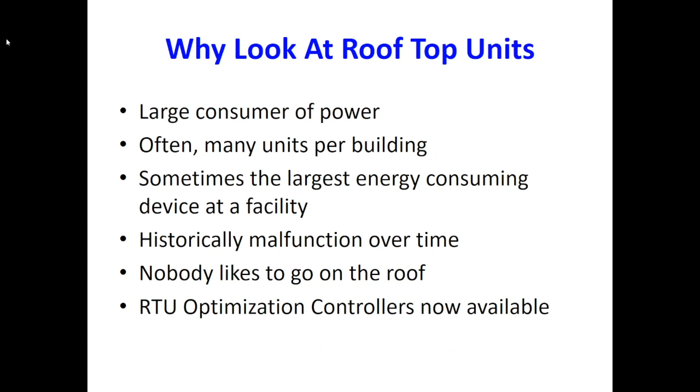We look at the outdoor air temperature. We look at the supply temperature, which is the appropriate things to normally look at. But we can also look at the CO2, which is down in the space, and the CO2, which is outside. And we also can monitor the supply fan and throw a variable speed drive on there and start to play some fun games with it by slowing the fan down.

And if the customer has a little old thermostat on the wall, the people who do this can go in there and put an EMS type Wi-Fi thermostat like we've heard about a little bit earlier. Or some folks can even put a VFD on the compressors here, depending upon what type model you do. But we're going to take this rooftop unit and we're going to change the way it operates. We're going to be measuring inside, outside temperatures.

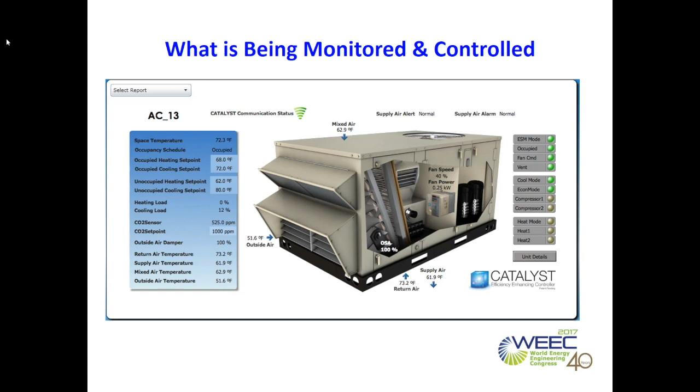By just paying attention and caring for the rooftop unit and making sure that it's operating to its efficiency, that's a lot of money you can save. And again, a lot of companies are doing this now. So it's sitting on the roof. Somebody paid for half of it. The utility paid the incentive. Now someone comes knocking on the door and says, hey, we have this demand response program. Okay. Geez, maybe I can use this new optimized system I have.

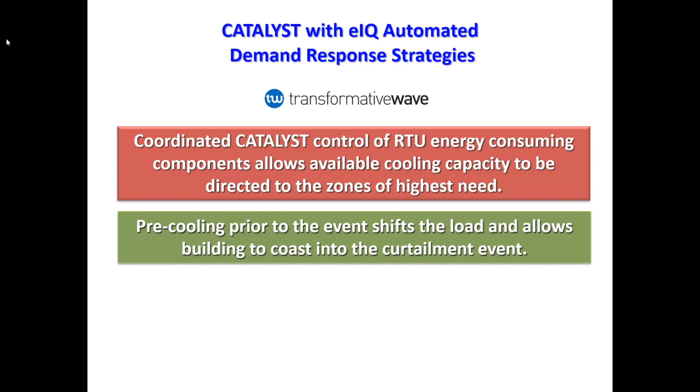And here's an example on the board here of some of the things that we could do in addition to all the energy efficiency saving measures that we got a rebate for and we're saving kilowatt hours. Well, we can start to do a little bit of the things you always see big high-rise buildings do. We coordinate the RTU energy consuming components that are available, and we can change zones. We can pre-cool the building. We've talked about that a little before in demand response stuff.

We can change the set points, but this is all inside to the rooftop unit. Okay? Duty cycle, things like that. So this is inside to one rooftop unit. So as we heard earlier in the first presentation, they're going to, I shouldn't say control, cycle on and off different rooftop units of 100 rooftop units or 1,000 rooftop units. Here we're just talking about one rooftop unit in this presentation. What are the different things we do for one rooftop unit?

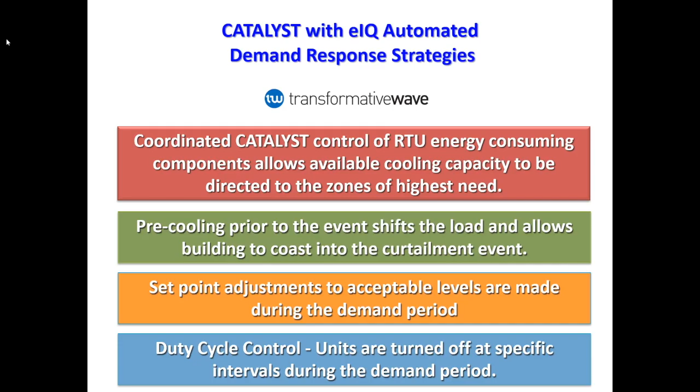And then once you get that all down, then you hit it with that swarm type stuff that we heard earlier today from Encycle, and your savings get even greater. And this just shows, we've seen a couple of charts like this today. This was done out at, I think this was Pearl Harbor, where they ran the rooftop units and they started doing demand response signals and all that stuff. And the rooftop unit went to a different sequence of operation. And above and beyond its normal energy efficiency savings, it was able to do demand response.

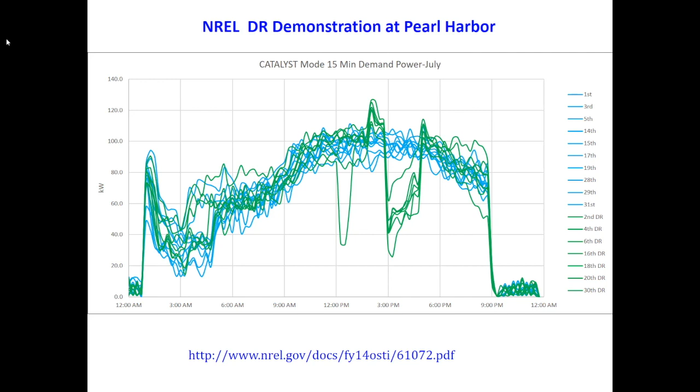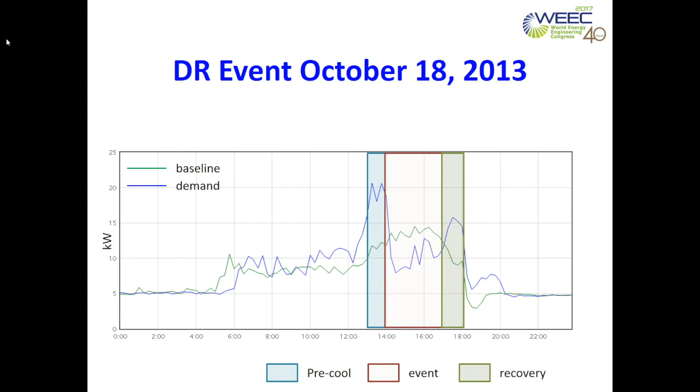So this is a little bit of what the chart looks like coming out. And then a little bit before, after. You've all seen these graphs before. The benefit of temporarily shifting our electrical usage. Okay, remember 30 years ago we were doing this at the utility. It's 2017 now, and we're still trying to do that, still trying to lower our peaks.

Okay, now on the rooftop units, there are other things we can do and manipulate that are kilowatt hour savings, demand savings, or can be both. And again, at the end of this presentation, I'll talk more about the dollars available and different ways of looking at it to maximize the amount a customer can get by operating his equipment in the appropriate programs.

So this is a system where we mist the condenser of a rooftop unit. Now, why would anyone do that? Why are you going to throw water at my coil and all that stuff? Well, believe it or not, if you mist into the air, it drops the temperature of the air. Now, we know that. It's called a cooling tower, right? We've all seen that before. Okay? You've all run road races. Someone misted you with a spray going by.

It feels pretty good. Well, here's a system on demand response that when they get the call, and it's usually in the summertime, you turn this system on, and it drops the temperature 25 degrees as the condenser coil sees. Drops down the kW during the summer if it gets called upon in demand response mode. Now that's important because when it's 100 degrees outside, it's 110 on the roof.

And your rooftop units, once it gets over about 100, 105, some of them are consuming almost 50% more electricity because the compressor has to work harder than at 30 degrees less. It's not a linear relationship. Hence, the whole reason we have demand response programs is because of the vapor compression cycle that you all have in your refrigerators, your cars, your homes, the building we're sitting in right now.

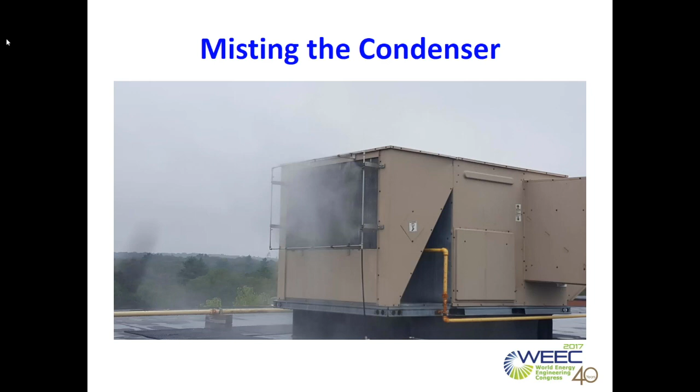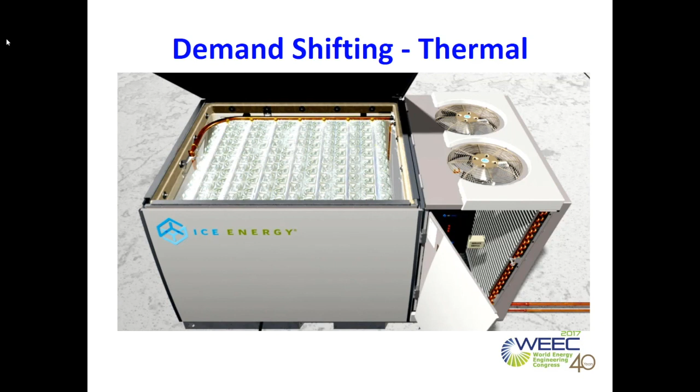Demand shifting—someone mentioned this earlier. Hey, if you've got heavy demand and your rates say $36 per kW per month in the summer, what can we do? Well, I can just make ice during the nighttime and use it during the day. That's what this does. So this could be a way of looking at the rates you have and saying, my electrical rates are so bad. You all know what a ratchet rate is? It repeats for the last 11 or 12 months. You get these different rates around the country—this might be a great device in Albuquerque, but not so good in Idaho. All these measures depend upon where you are. That's an Ice Energy example of one, again using ice.

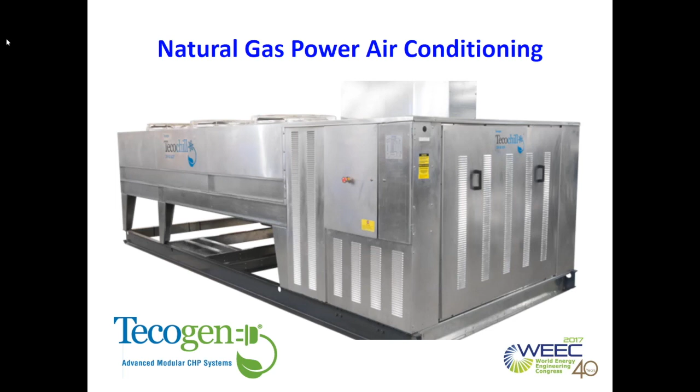Natural gas—you might have rooftop units getting old and want to replace them, and someone says the electric utility may incentivize you to put in gas units. Sounds a little weird? Think it happens? Sure. There are many utilities across the country running out of capacity—copper in the ground. Anyone from New York City here? Are they running out of copper in some places around New York? They're paying people 80% to switch from electric air conditioning to gas air conditioning, and the electric utility is paying you for it—demand reduction. Not saying you should do this, but it's something to look into.

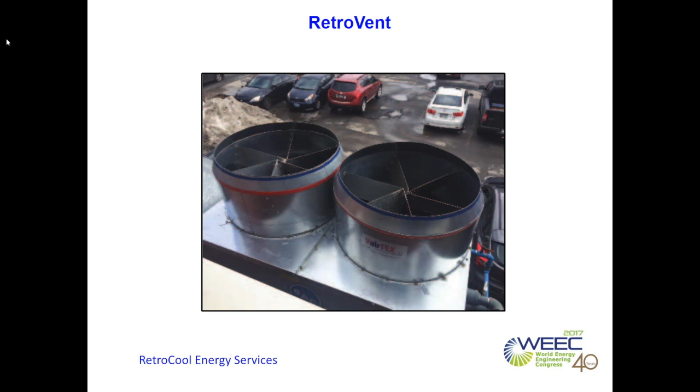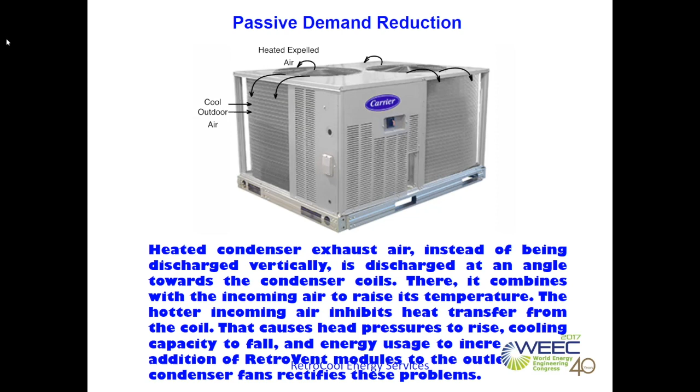Passive demand reduction—rooftop units are sitting there. What are some other additional energy conservation measures we can do? As a retrofit, you put these on top of your rooftop units or condenser coils. Here's another picture of it—it pulls the air and sends the condenser air far away from the rooftop unit. Going back to this slide—you've all seen those before, right? Anybody ever walk up and put their hand over the fan? People would think the air must be blowing straight up. No, it goes sideways, right into the cooling intake for the air. So they're dumping very hot air right back into where they're trying to cool it off—it's just recycling it. This is an example of a demand reduction measure where the utility would incentivize it.

They get credit from the ISO as a capacity market resource. You may not know that as a customer—you may just get a rebate from the utility or an incentive, whatever the case may be. The misting type controls can be either fixed or cycled. This one is fixed so it's working all the time, but it's still a demand reduction measure, and a kilowatt-hour savings measure I should say.

Go back two slides—that one? Those are just duct extensions? They're duct extensions with vanes inside at certain angles calculated to spin the air and get it away from the condenser. It's the same concept as the front of a jet engine, with vanes to speed things up—no moving parts. We all know this, but I'm just giving you examples. It's a cowl with blades turning inside, as examples on the roof.

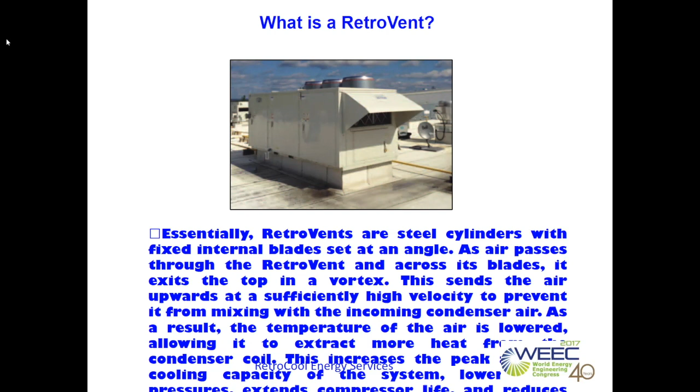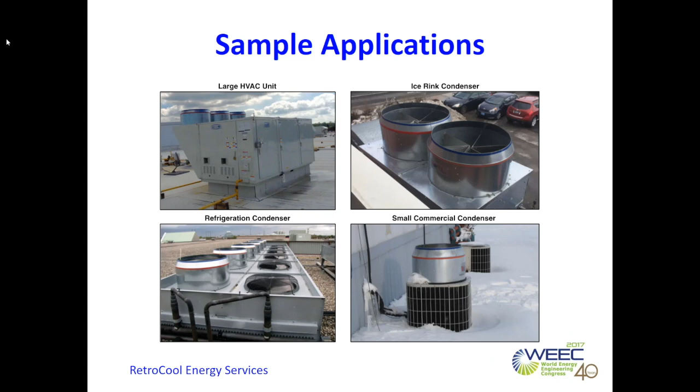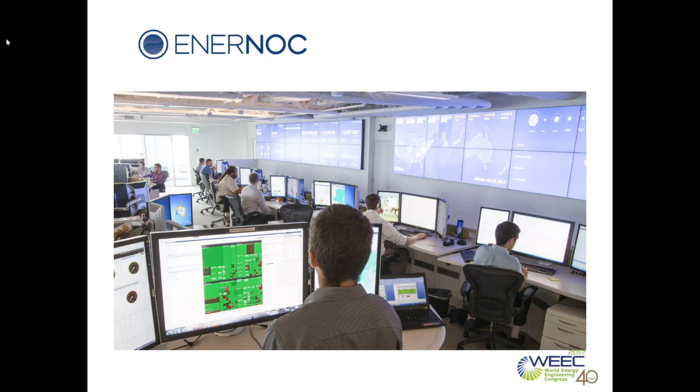This is just a slide showing EnerNOC Center up in Boston, where they actually look at all the folks' meters all over the country and all over different parts of the world. And when they get called upon for a demand response measure, whether it's Albuquerque today or London tomorrow, it gets initiated out of this location. This is why large corporations tend to use these demand response providers.

And again, there's money from demand response coming in, there's money from energy efficiency coming in. Some of the programs that are available out there - there's 50 states, 100 different investor-owned utilities, many different ISOs and RTOs out there, and many different programs available to them. So I just threw a couple real quick ones up on the board.

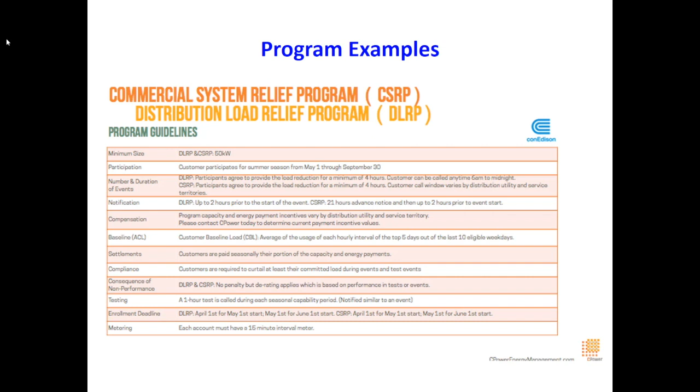This is for Con Edison, some program examples that you have to do to get money. This happens to be a couple of slides from a company called CPower, another demand response provider, with different programs. So all these ISOs allow for a bunch of programs, and the utilities within those ISOs deal out a bunch of programs, but they're all different in their own ways.

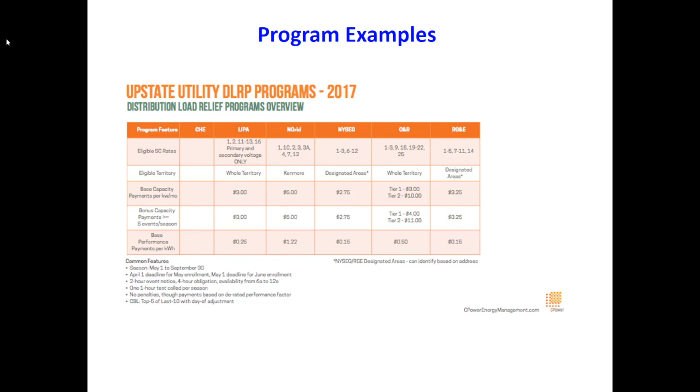And so for every single building you have to look at where the building is and then look at the opportunities presented to you. Even one state can have 20 different demand response programs. But the goal of you, if you're a customer - and here's another one, in New York State - is at least look at these. You may not be able to participate in a lot of them, but if there's 6 available and you can participate in 1 or 2, a voluntary program, why don't you go ahead and do it? Why don't you have that rooftop unit controller do something besides just energy efficiency?

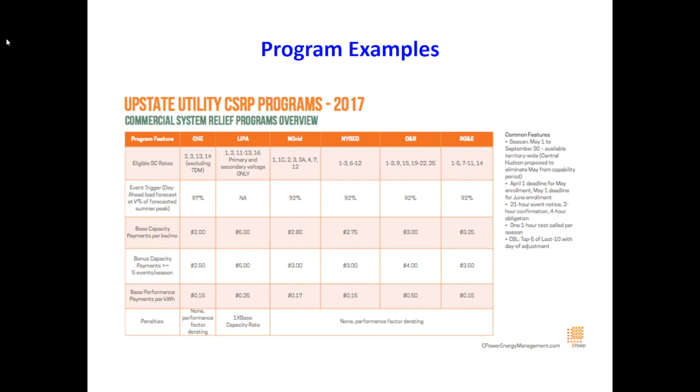Let's use it for demand response. It has the capability, it's built in, it's sitting there already - enable it and use it. The incremental cost isn't that much, is it? It's already sitting there, but many of them are running right now and they're not even in programs.

So which route should you go down for your rooftop units? Which one would you go down? Well, if you look at the far right, left, you've got your rooftop units sitting here. We talked about a few examples of misting or venting with those devices and optimizing it, right? We talked about Catalyst, Bes-Tech, and NexRev, and they're going to go in there and throw some stuff to optimize this. So this is really going to be slick, using the least amount of kW and kilowatt hours you can possibly get away with.

Then there's going to be technology like the folks at Honeywell that we heard a little bit earlier. It's going to enable us to go right there through them into the demand response programs. We may have to go through demand response providers with these systems - you might have to sign, we definitely sign deals with demand response providers. Some places you can go directly to the ISO, and then you've got the electric utility over here. In some instances, they're the providers, but they're also the providers of money for the passive type demand reduction dollars.

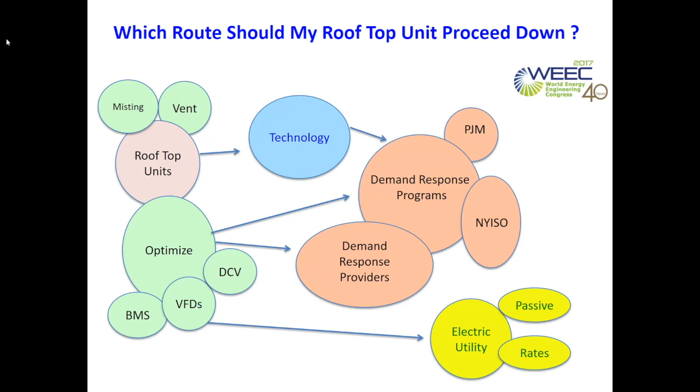Okay, so putting this all together, thinking about the first thing I said, to save money. There are over 60,000 electric rates across the country. So everyone in this room who has customers or works for you, your buildings are going to be all over the place. Always look at each place, look at the opportunity available for you.

Most of your buildings are going to have a monthly kW peak demand on your bills. So that's one thing we pay attention to, or we may have a contracted demand. We have to pay attention to that. We also, on our local distribution company bill, the LDC bill, may have peak and off-peak charges. It involves time, so now we can manipulate that a little bit.

Ratchet rates, I mentioned that a few minutes ago. You really don't like those rates, and if you can avoid that by avoiding going over a certain type of demand, time-related—all these things I'm talking about can be affected by the rooftop unit.

So you're in one of the 15 deregulated states, you're buying power from a power marketer. Some of you do that, you're familiar with it. How do they give you a price for your building? They looked at your interval data. What does interval data mean? It's time, right? Everything's going back to time.

Demand responses, day ahead, hours ahead—you're all familiar with these. Some folks turn machines off. The utility turns machines off at industrial facilities. Think about that. You can go day ahead, hours ahead.

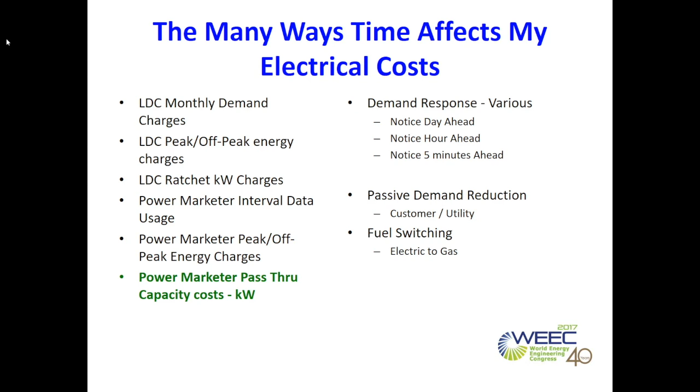And the money available through all the programs—we don't have time to talk about them right now this afternoon—is available to everybody through the demand response, your billing, your utilities and stuff. Also, to bring the point back here: make sure you pick the right one. You're allowed to double dip, and sometimes triple dip, in these programs. But that's why you may want to ask a professional to help you out, because all these tools are available to you.

As Ben Franklin once said, dost thou love life, then do not squander time, for that is the stuff life is made of. Another famous saying: dost thou love saving money, then do not squander time, for that is the stuff demand reduction money is made of. Okay, thank you.